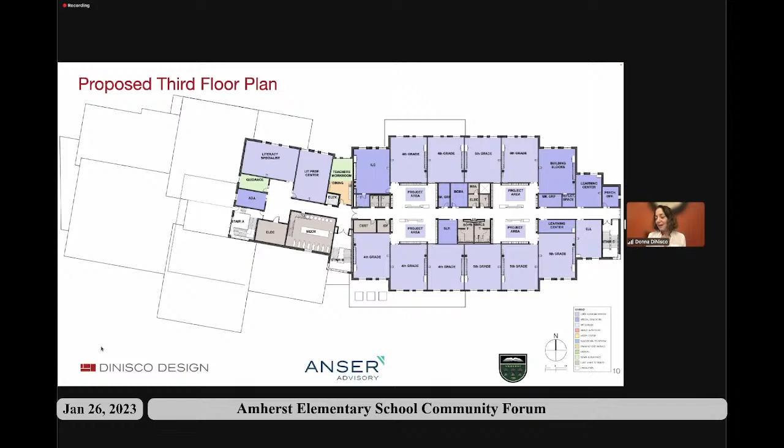As we go to the third floor, you'll see the program gets smaller, which really helps break down the scale of the 3-story building. The third floor is primarily academic, with 4th and 5th graders. As they rise in stature in their tenure at the school, they'll also advance to the third floor. We think that will be pretty special for them.

So with that, I'm going to turn it over to Tim, and he'll walk you through the site and the building. Thanks, Donna.

We're going to take a walk around the outside of the building now, and then get inside, starting at the front door in the west where parents will drop off. Then we'll move around to the playground areas and outdoor areas outside of the cafeteria, directly north of the building.

You can see a light-filled lobby at the entrance with administration directly to the right to control access and greet people as they come in.

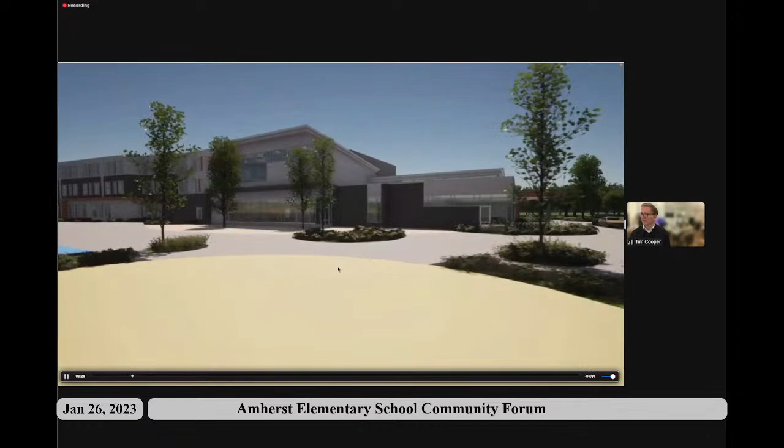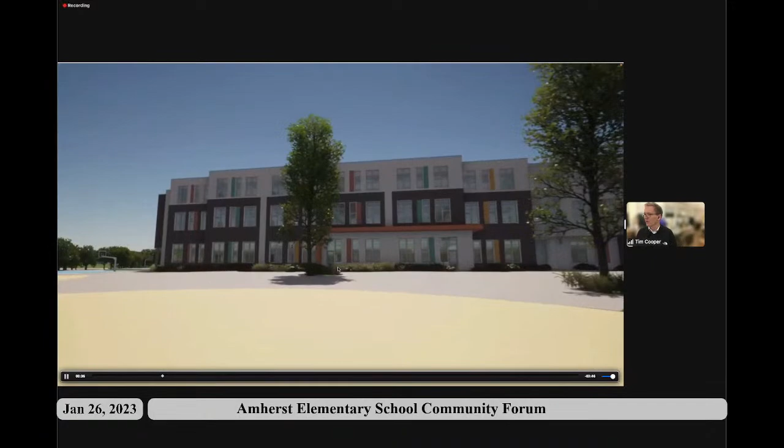As we go around through the playground to the north, you can see the cafeteria and the media center with expanses of glass to enjoy the view of the site to the north. Because it's north facing, there is not glare. You'll see that the facade is based on masonry material, which is cost effective but still has a lot of color available to express a design appropriate for this elementary school.

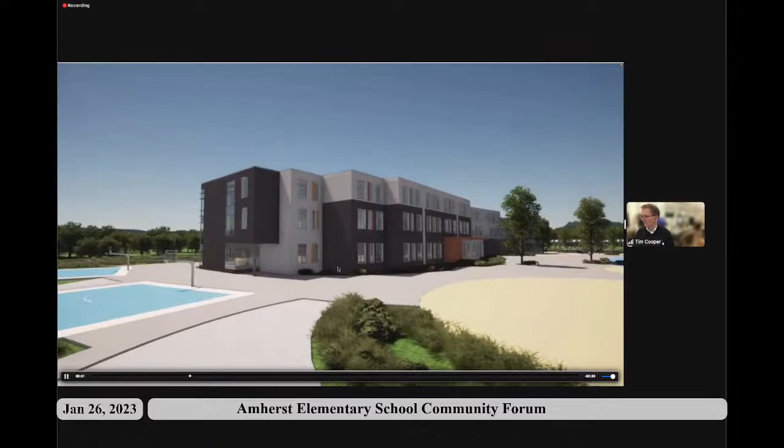As we circle around, we can see where the playground will be and where the basketball courts will be, to the west of the building. The planted areas are the rain garden features Donna mentioned, which will serve as outdoor learning areas in addition to keeping the site dry.

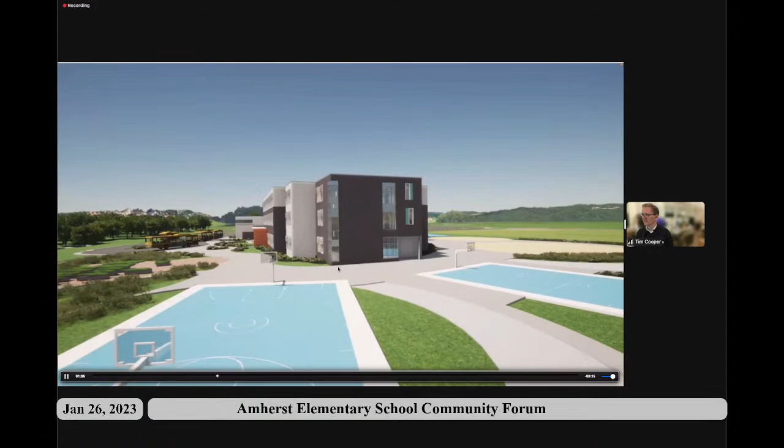As we circle around to the south, you can see the outdoor learning planter beds, pollinator gardens, and other aspects of the site that we will weave into the curriculum. On the south side of the building, the windows into the classrooms are quite large to let daylight in, which has been a driver of the design all along. You can see sunshades, which will control glare.

And then as we move to the west, you can see the entrance that students arriving by bus can go through.

There are stairs with lots of glass to allow light into the building, and the gymnasium as we come up on the left with large walls, which is an opportunity for art and murals, which we have discussed as being important to the culture and community of Amherst. And then you can see PV on the roof, and also as you circle around the building in the parking lot, that will contribute to the town's net zero goals and have the school be self-sufficient energy-wise.

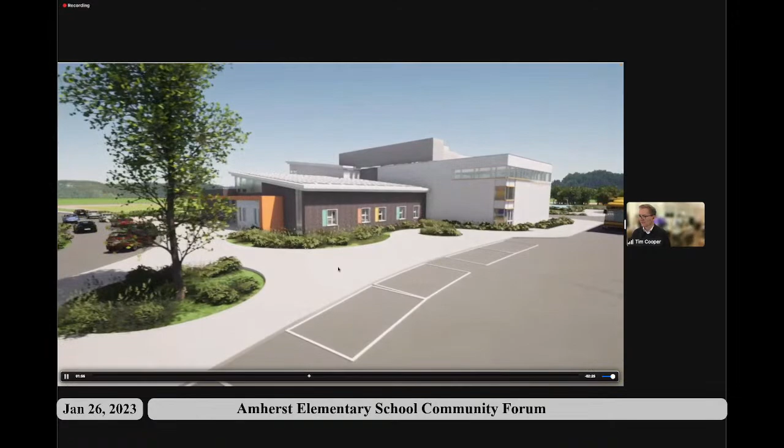Moving into the lobby now through the secure vestibule, you can see the main office directly as you enter the door. There are areas for art and display. There is a colorful light-filled space that you will circulate through and get into the community aspects of the building. Directly ahead is a light-filled stair that will bring you to the academic upper floors. The gym is to your right here. It will be light-filled, but light will be controlled.

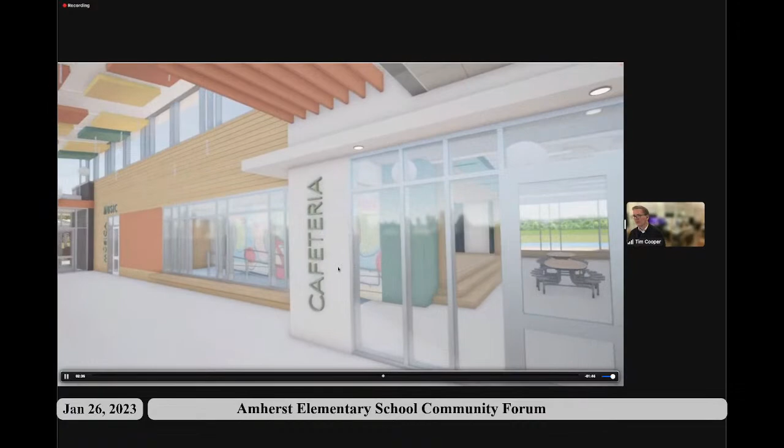And then as we circle around to the north, you can see through the cafeteria to the site that you were lucky to have for this building. Also in the main public area of the building is the music room, which is available and next to the stage for performance.

We're now going to move upstairs into one of the project areas that are outside the cluster of classrooms. There is storage for students and storage for teachers above the lockers. This is where you have space for pull-out learning and project-based learning. You can notice the doors to the classrooms have large side lights to let light through the classrooms into the project areas. There is also transoms above the storage that will allow light above that into the project areas.

So as you walk through the building, you have a connection to the outdoors, both through daylight and in certain areas, seeing all the way out. Here we are in a classroom looking south, so you can see the sun control on the outside. There are 2 sinks in every classroom and storage for all of the needs of the teachers and the students. And here you can see the connection from each of those classrooms to the project areas that are outside, with 3 classrooms on either side of the corridor that goes between the 2 project areas.

And then as we leave the project area, we're going to go into the media center, which is in the STEM suite. There is obviously space for books, but in addition to that, there is teaching technology and space for full classroom education. As we circle around, you can also see that there is a storytelling area for small groups, and the other systems that are needed for the library to run: the circulation desk, the room for the librarian to work, and you notice all the glass that lets the light that comes into the library get into the corridor.

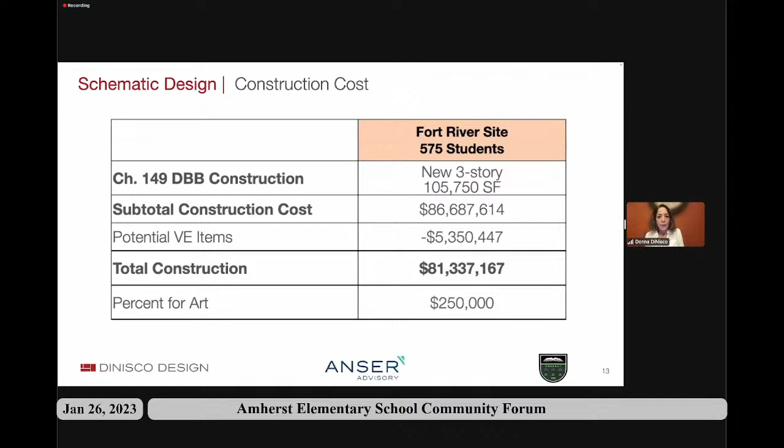Okay, well, to follow on the presentation by DiNisco, I'm going to talk about, as is my role, the overall project cost. This project is seeking, and we anticipate funding from the MSBA. So this is a way of showing everybody assembled how we got to this number, which is the hard construction cost, which is what we'll be carrying.

I want to say about all of these numbers, a little bit like the design looks like it's complete, it's really actually far from complete. It's at an early level. These numbers are very specific because that's the nature of the process, to provide specific numbers. But I'd like people to understand that these are still estimates. These aren't bid numbers, so they're all likely to change a little bit. So as I talk about this, I'm going to round a little bit.

So here we are, a little over $81 million in construction, which includes this really great recent effort by the building committee to seek cost savings.

It's really great to see these plans progressing. I had kids at Fort River, and this will be an amazing change to what they went to for their schooling. I have a couple of questions, not about the building design. You mentioned there would be demolition of the existing building at the successful conclusion of the project. Are those costs separate, or included in the construction cost? My other question is about Wildwood. I know this isn't your purview, but will Wildwood continue to be open for some new use, or is that also slated for demolition? Thank you.

I also wanted to state the demolition of the Fort River School is included in the project, and so are all of the PVs and everything.

As for the future of Wildwood, I'm going to let Kathy speak to that. So the future of Wildwood is a question mark right now. It's a two-step process - assuming this school moves forward, we'll have a vacant school, and it's currently owned by the state as an education property, so it would have to be released to the town. We just started talking about what happens when a big property like this comes online. When I say we, it's the town - I'm on the finance committee. We just started talking about reactivating a disposition process. So there are multiple possible ways to go.

I want to point out that the building itself is currently heated by oil, has no insulation, and has asbestos. So the types of things we might think of doing about it, we're going to have multiple options. That doesn't need to be decided now. I think we'll start a process to at least begin thinking about the choices, and then it will open up to a much bigger public conversation. But fortunately for DiNisco, they don't have to figure that piece out.

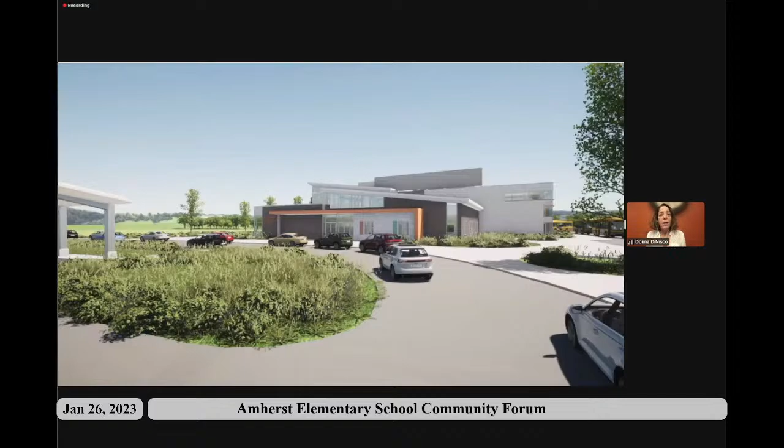Yes, as part of the project we are incorporating a raised elevation to bring the building up above the high water table by a couple of feet. Is that your question? So all of the work we've been talking about is incorporated into the project. As far as managing stormwater on the site, we've incorporated rain gardens, which are actually stormwater systems we'll be able to benefit from educationally.

Mary? We'll have to unmute you. I think we have to unmute you, Mary. Can someone? Try again, Mary. Am I okay now? Yes.

Oh good, thank you. Just a couple things. One was in terms of outreach, I was wondering if it's possible to schedule a charrette at a different time, like Saturday morning at the library. I know both of my kids couldn't make either of these sessions, one because of young children and the other because of working full time. The library on a Saturday morning, which according to staff is full of children, might be a good time so more people could see this.

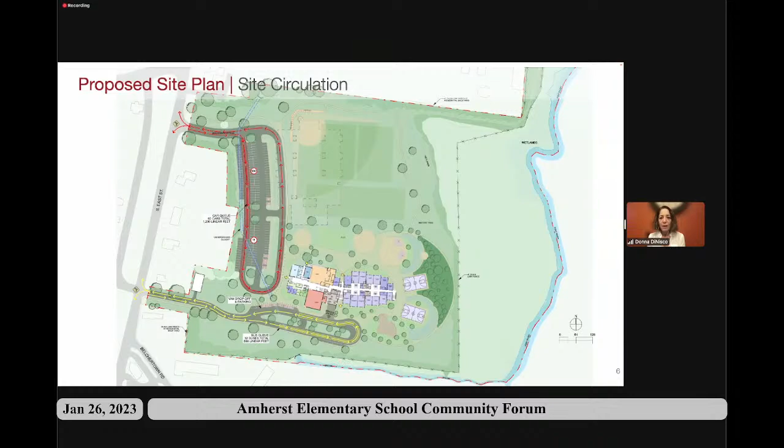There was another question asking if we could review the proposed surfaces in the outdoor areas. They believe there was some misinformation in the newspaper today about grass under the playground equipment. I did not see this in the paper, I sometimes get it a day late, if that was what was stated in the paper today.

Tim, do you want to walk through and describe the surfaces that we're providing? Sure. As it exists now in the design, there's hardscape with paving between the building and the play areas. The play areas themselves, where you'll have playground equipment, use a poured-in-place rubber surface that is soft and allows water to flow through it, so if anybody falls off the equipment they won't get hurt. That same surface is used on this play area, which can be plowed or brushed off in the winter, allowing outdoor play not on a hard surface year round. There are quite a few months in Amherst where there could potentially be ice or snow and not a place you'd want to play, but this takes care of that. Beyond those, and the hardscape where the basketball is, there are the fields, which is grass.

So I hope that answered the question. Johanna or Nick, I don't know who's behind that face. There you go, make sure you're muted. Yep, hi, it's me again. Thanks for the clear and specific answer to my first question. Johanna, who's here in the background, and I have one other question.

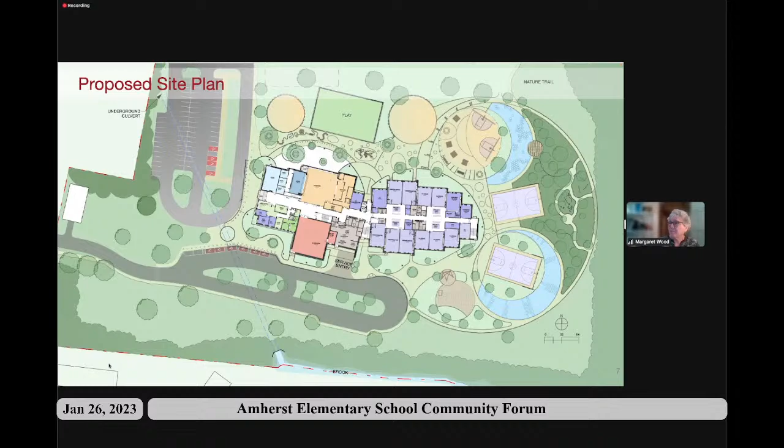All right, well thank you everyone. This was great, it was actually nice to see some new faces, and we're excited, as excited as you are, to really make this a reality for the town of Amherst. So continue to stay involved, you'll continue to hear from us. This truly is just wrapping up the schematic design, and we have a couple more iterations. We'll be entering design development on May 3rd, I think is the date. So this is not the end of the conversation, and we thank you all for your input—you're really making this a better school.